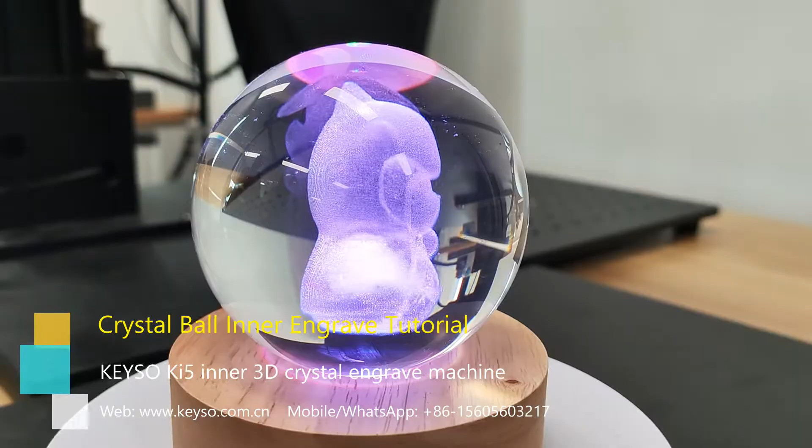Hi guys, in this video I'm going to show you how to make this beautiful crystal ball inner engraving with Ki5 inner 3D engraving machine.

To engrave inside the crystal ball, we need to turn the machine upside down, just like in this video. Turn the machine upside down. We also need a bracket, so we can put the crystal ball and mold on the bracket.

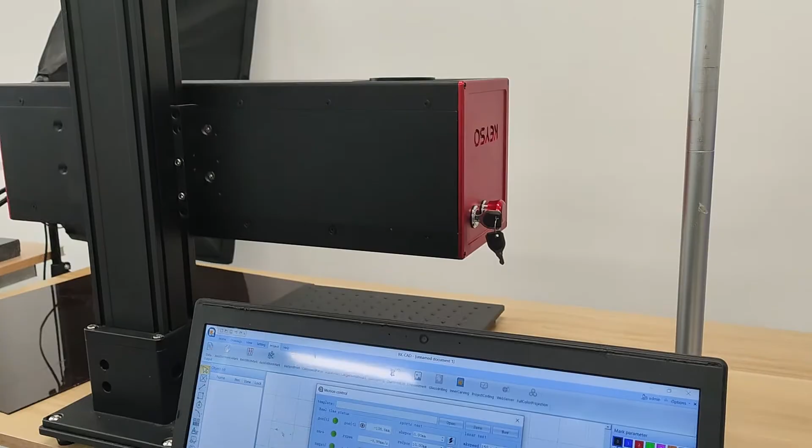By default, in the EZCAD setting, motion settings, when we press the up button, the Z-axis will go up, and when we press the down button, it will go down. But we need to check this revert, so when we press down, it will go up. When we press the up button, it will go down. This is what we need to engrave a crystal ball.

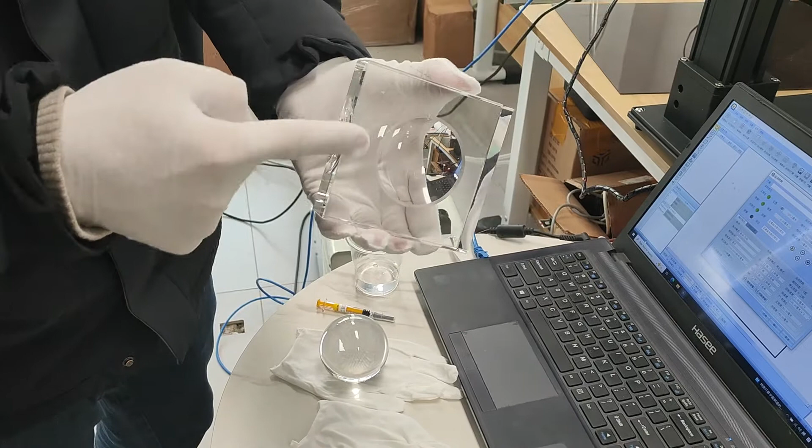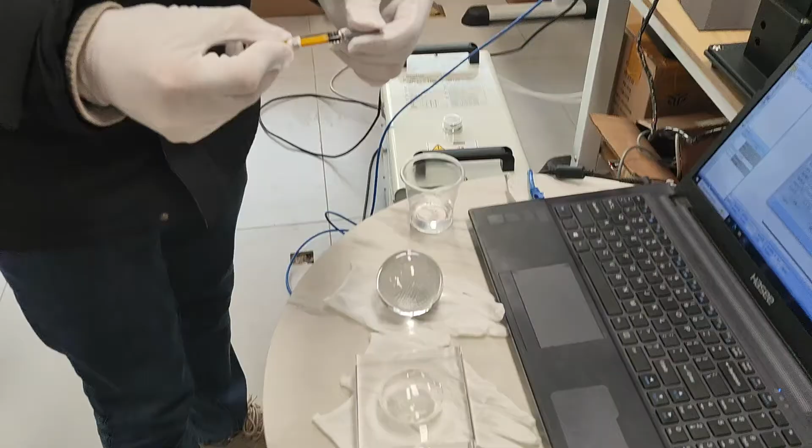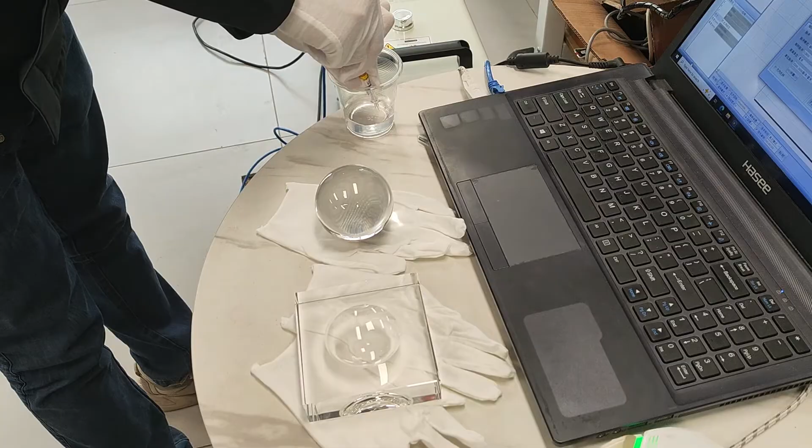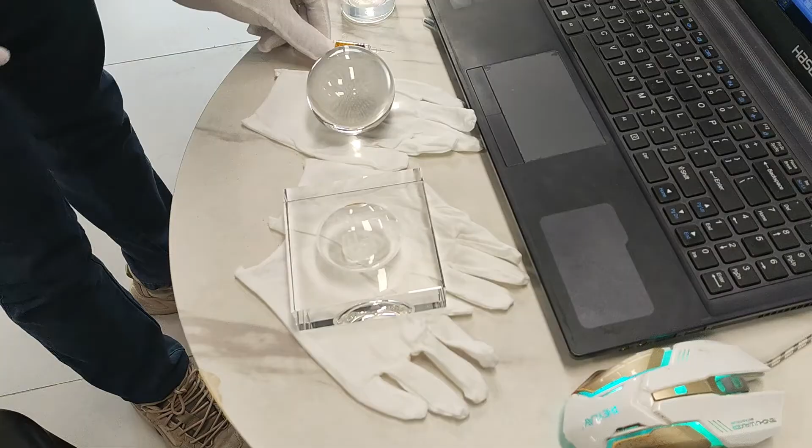To engrave a crystal ball, we need a mold. This mold has a curve, so we can put the crystal ball into the mold. And we need to fill water between the crystal ball and the mold. It will need around 1 milliliter of water to fill the gap between the crystal ball and the mold. Around 1 milliliter of water is needed.

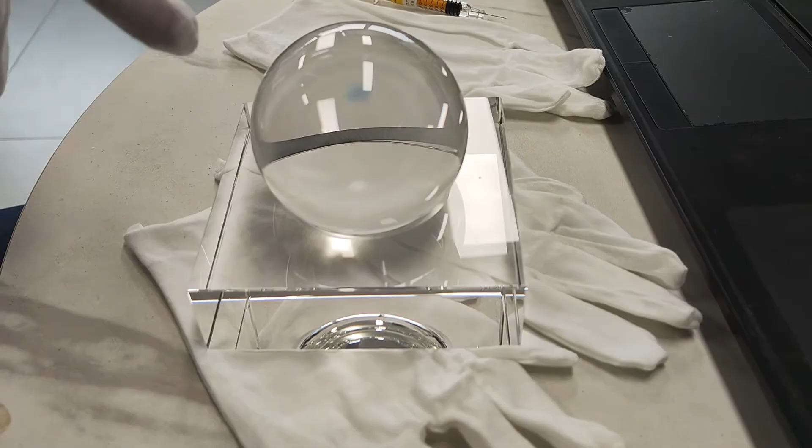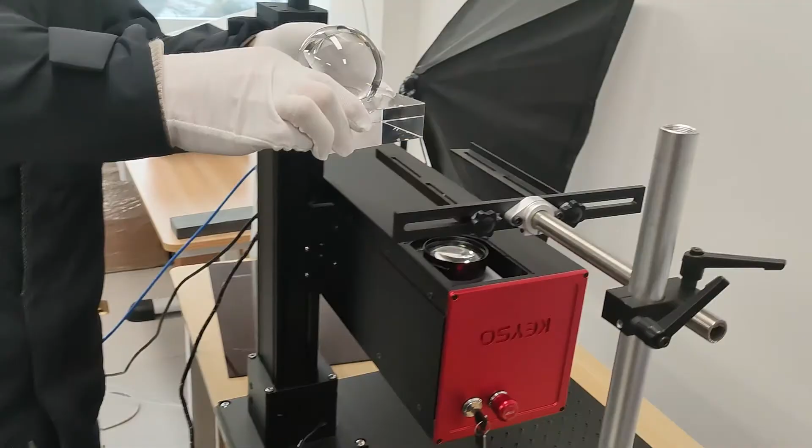And then put the crystal ball into the mold slowly to avoid bubbles. Slow to avoid bubbles. The gap between the ball and the mold is filled with water now, and then put the mold and the ball on the bracket. This bracket can be purchased from the internet or purchased from Keyso.

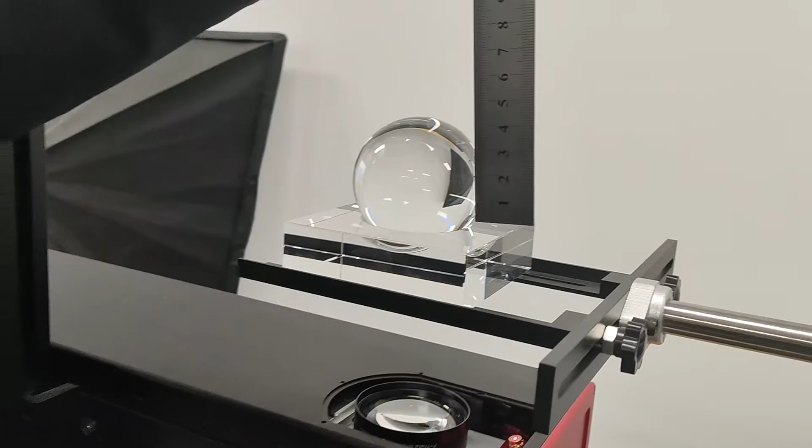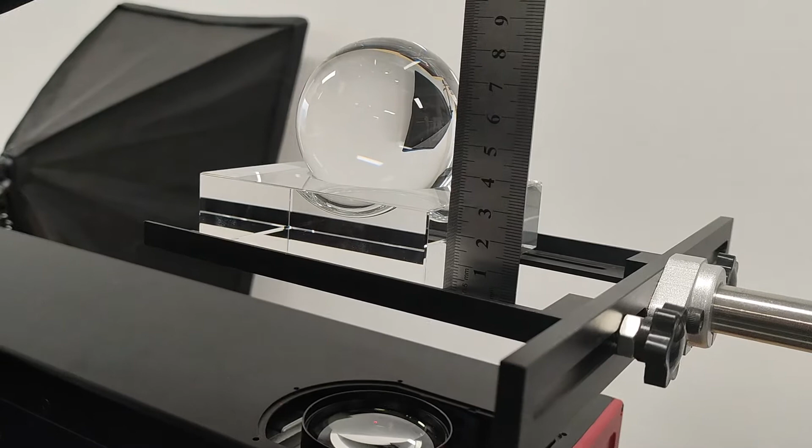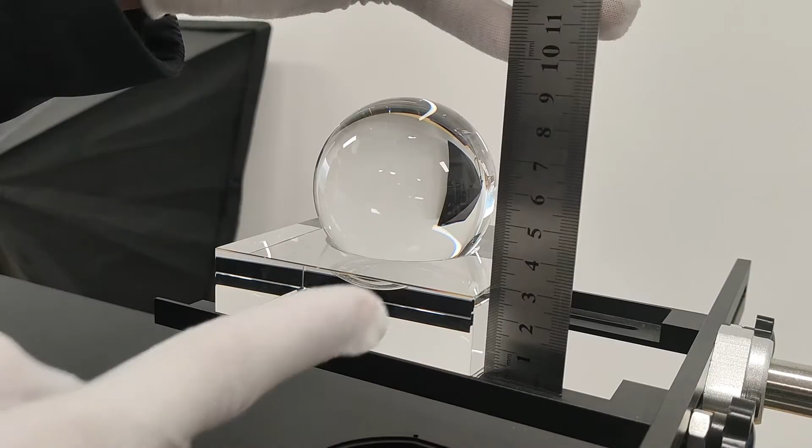Before we start, we need to check the height of the mold. In our case, it is 30 millimeters. We also need to check the height of the ball side, from the center of the ball to the mold surface. In our case, it is 21 millimeters. 30 millimeters plus 21 millimeters, we got 51 millimeters. 51.

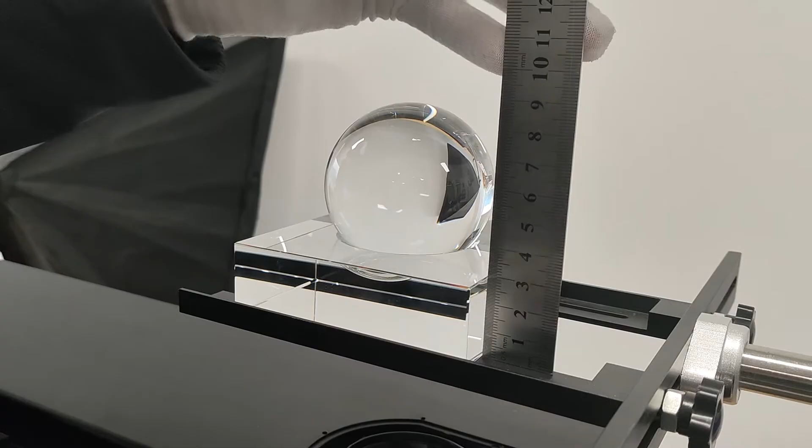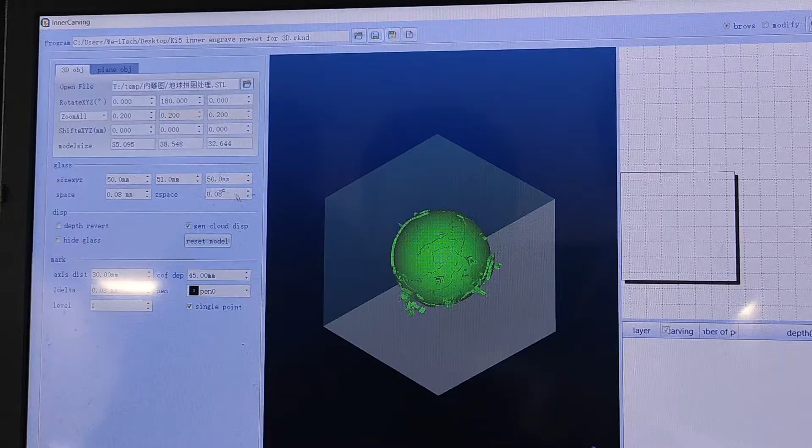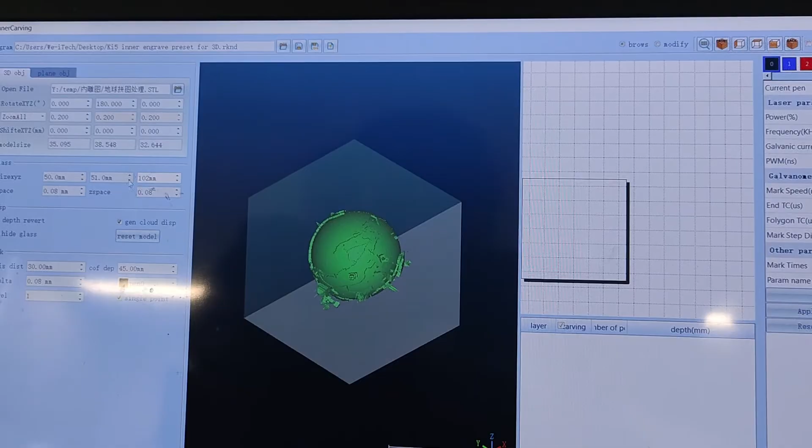Same as before, we need to import an STL or OBJ file into the software and adjust size, position, angle, same as before. The only difference is we need to set the Z-axis height to double of 51. We got 51 previously, right? Now we need to input double of 51, that is 102, to make this virtual crystal block.

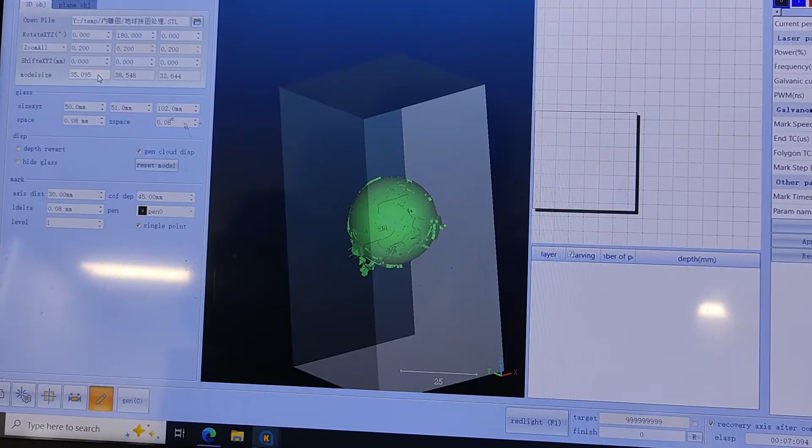The size we recommend is half of the crystal ball. For example, if the diameter of the crystal ball is 70 millimeters, then the size of the 3D object in the software should be half of that, that is 35 millimeters. Then generate.

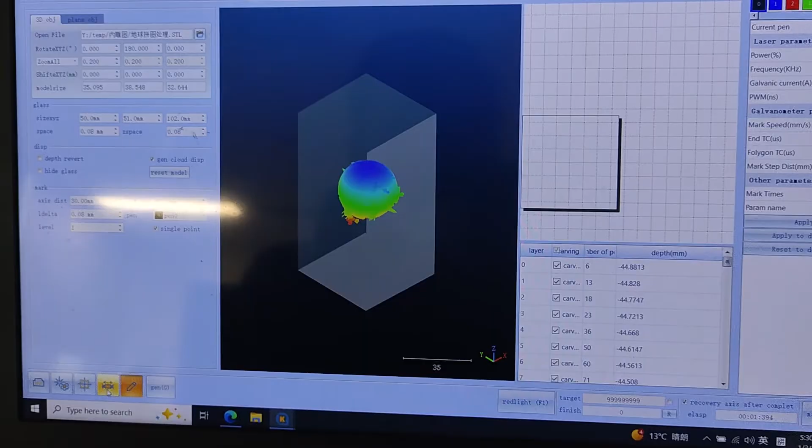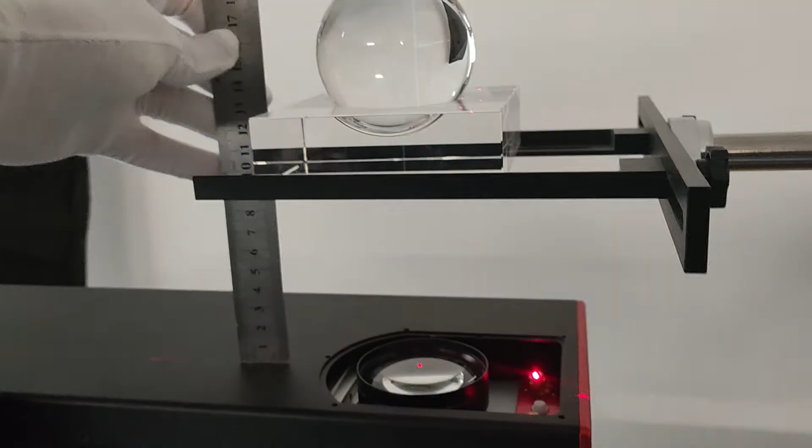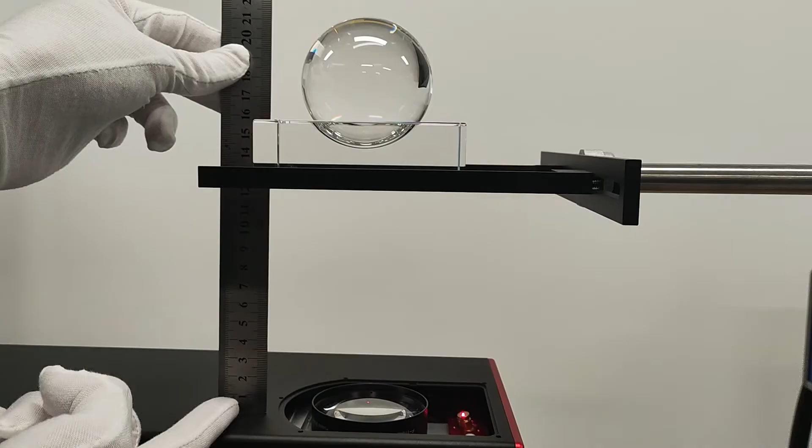Finally, same as before, we need to move the Z-axis to find the focus point. We need to set the focus point to the bottom of the mold. The distance from the lens to the bottom of the mold should be around 129. This distance can be measured from our previously made tutorial on crystal block engraving. Now the focus point is set to 129 mm.

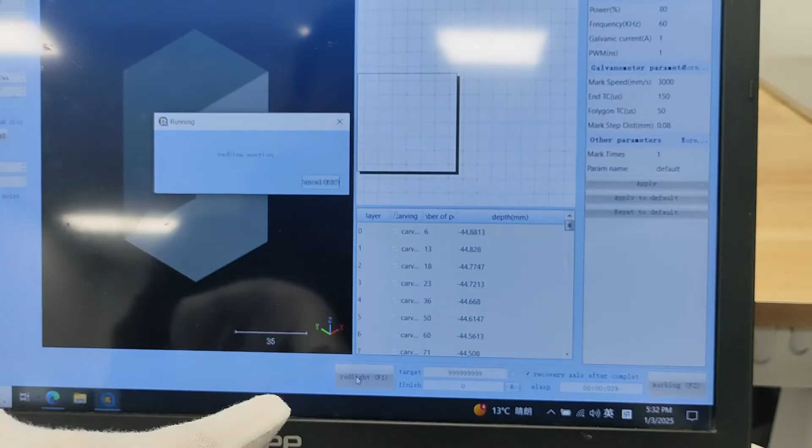Now we need to set the current position to home, to 0, and then click OK. Now the machine is calibrated. The focus point is set. Now we can click red light to get a preview. And now cancel the red light preview.

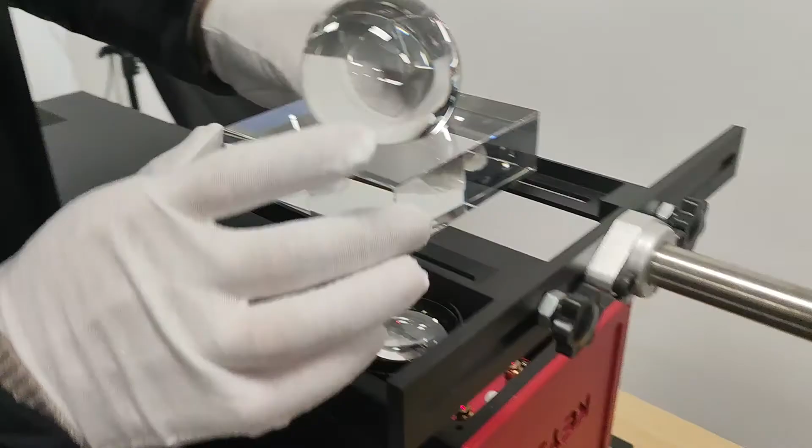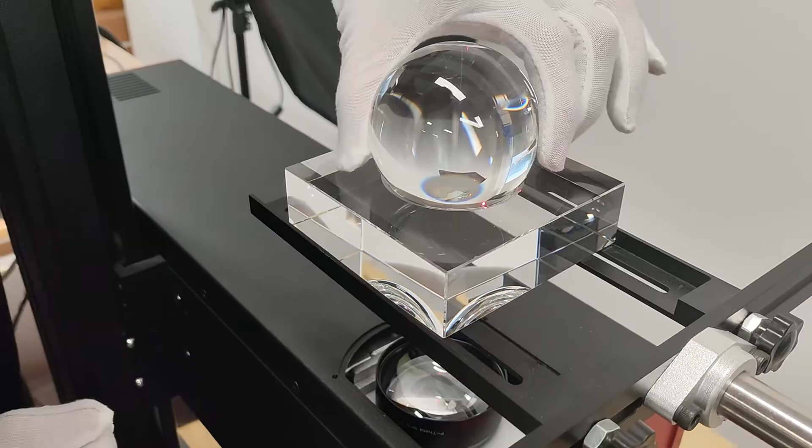We should be able to see the red laser or blue laser inside the crystal ball. We need to bring the laser beam to the center. Move the crystal ball to make the laser in the center of the ball. We can see a red dot. We can also see a light blue laser. We can also remove the crystal ball to check if the red light is in the center of the mold, and then put it back.

Now we can start marking, engraving. Let's have a clear, close look.